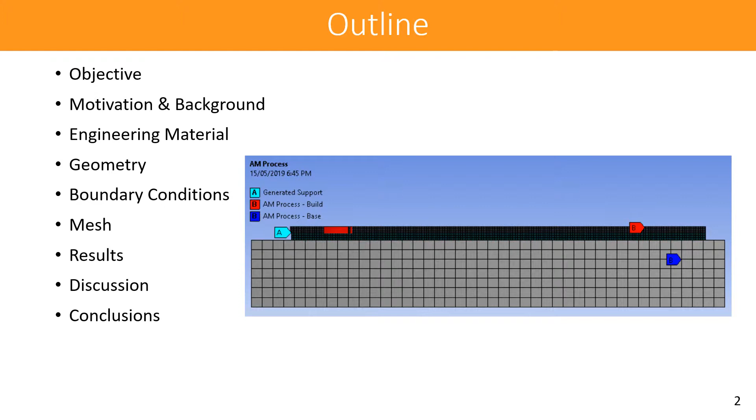This project focuses on studying an additively manufactured part subjected to two extreme solar radiation cycles in low Earth orbit space with the new additive manufacturing tool of ANSYS 2019 R1. Two coupled simulation studies have been carried out. First, transient thermal analysis to see the effect of two extreme radiation temperatures on the build parts, and then static structural analysis to find out the structural effect on the build part caused by the additive manufacturing process.

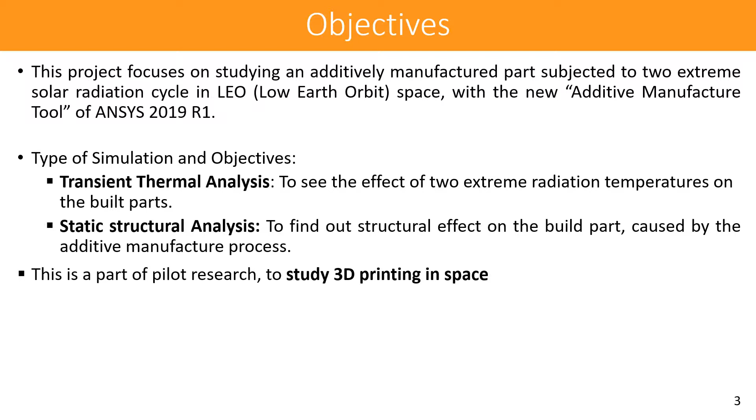This project is also part of a pilot research to study 3D printing in space that is currently under consideration at CSETR of UTEP. Additive manufacturing technology is rapidly developing since its introduction in the 1980s and spreading to almost every sector today due to its inherent capabilities. It has truly transformed and revolutionized today's design and manufacturing sectors, offering enhanced performance and custom capabilities in almost every sector known.

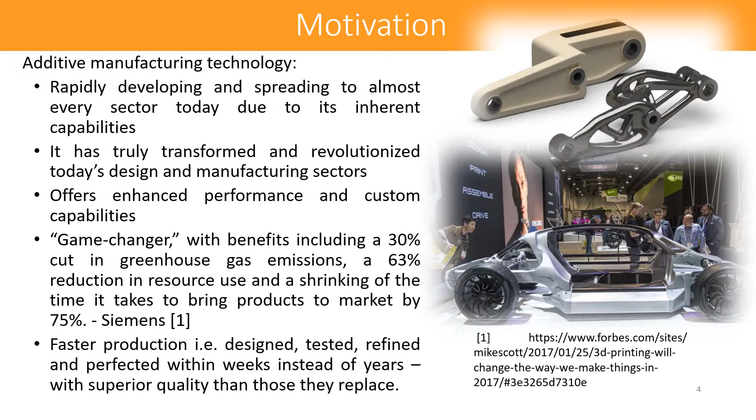According to Siemens, the technology is a game changer, with benefits including a 30% cut in greenhouse gas emissions, a 63% reduction in resource use, and a shrinkage of the time it takes to bring products to market by 75%. Thanks to improved design flexibility, components that could take 2 years to progress from drawing board to factory can now be designed, tested, refined, and perfected within weeks instead, and they are of higher quality than those they replace.

As mentioned earlier, additive manufacturing is spreading rapidly, and now it's time to apply it to space. Consider this, it takes $2 million for a single brick to be shipped to the moon. Considering such prohibitive transportation cost, a 3D printer would definitely prove to be cost-effective and produce items as and when needed, which would no doubt improve operational capabilities in space. However, in order to reach that stage, we need to overcome the challenges of space. Of the challenges, this project will deal with the extreme temperatures caused by solar radiation.

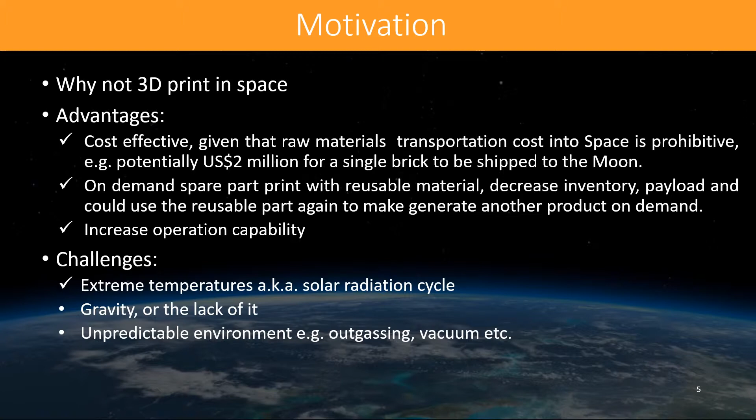Already, NASA and some other organizations are taking steps to counter the challenge. In 2014, NASA scientists aboard the International Space Station 3D printed a ratchet wrench for the first time in human history, using a CAD file transmitted from NASA's Marshall Space Flight Center in Huntsville, Alabama.

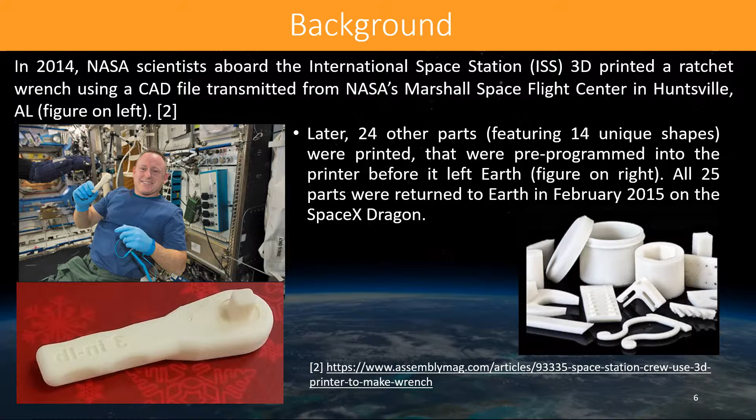Later, 24 other parts, featuring 14 unique shapes, were printed that were pre-programmed into the printer before it left Earth. You can see the 24 parts on the right side of the screen, and all 25 parts were returned to Earth in February 2015 on the SpaceX Dragon.

316 stainless steel is chosen. It is a popular space-grade material that has the ability to withstand high temperatures, atomic oxygen, and other features as well that are critical in space engineering. The material library provided by ANSYS contains 6 materials typically used in metal additive manufacturing, including our selection, 316 stainless steel.

For additive manufacturing thermal and structural analysis, the material property requirement is a little different. Thermal conductivity, density, specific heat, elasticity, plasticity, etc. All of the properties need to go all the way up to the melting temperature of the alloy, because each layer is introduced at the melting temperature. The assumption here is that in the layer there is no overmelting or undermelting of the powder. The entire layer is brought right to the melting temperature.

And as it cools down, as the layer decreases in temperature, it needs to have the full conductivity, Young's modulus, and all of the properties assigned from room temperature to melting temperature, so it can simulate that area of high temperature. In the engineering library, these data are provided.

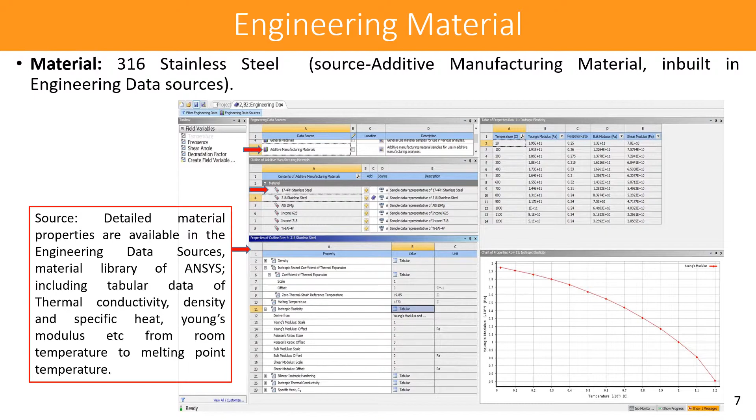A simple combination wrench is chosen for the project. This versatile tool may come in handy, keeping in mind the background story. Defeaturing of parts or segments, such as fillets on the grip side, is done to facilitate contact between base plate and build for computational simplicity. A base or build plate geometry is also designed at a shallow distance, that is 5 mm along the z-axis below the wrench, and a gap is kept to generate support.

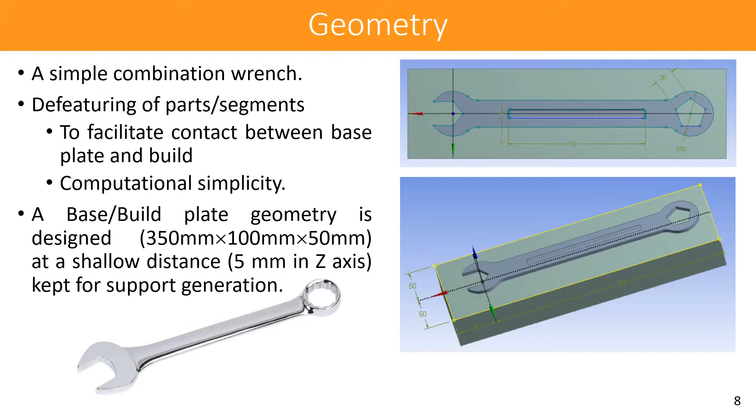Of all the vastness of space, this project focuses on the thermal cycle challenge at low Earth orbit. According to J.H. Han and his group, the maximum and minimum operating temperatures at LEO for the thermal cycling simulation are 100 degrees Celsius and minus 70 degrees Celsius, and no gravity force will be applied for this analysis.

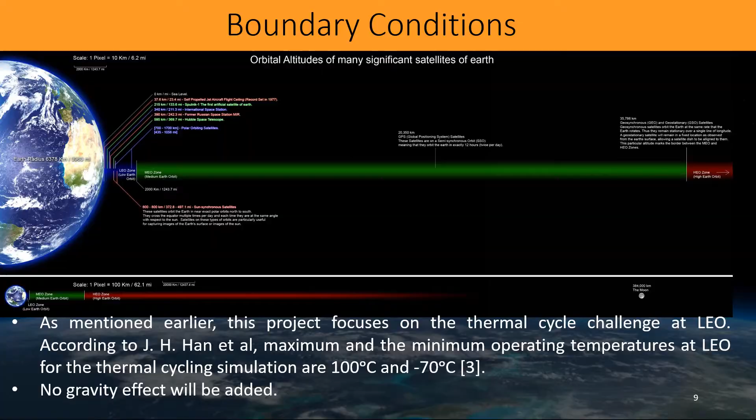One thermal cycle from 100 degrees to minus 70 degrees and again back to 100 degrees Celsius takes about 64 minutes. So it is safe to assume two extreme radiations as the study suggests. Therefore, we will be considering transient thermal condition 1 at 100 degrees Celsius and condition 2 at negative 70 degrees Celsius. Some of the other assumptions are that the enclosure or room temperature will be 15 degrees Celsius.

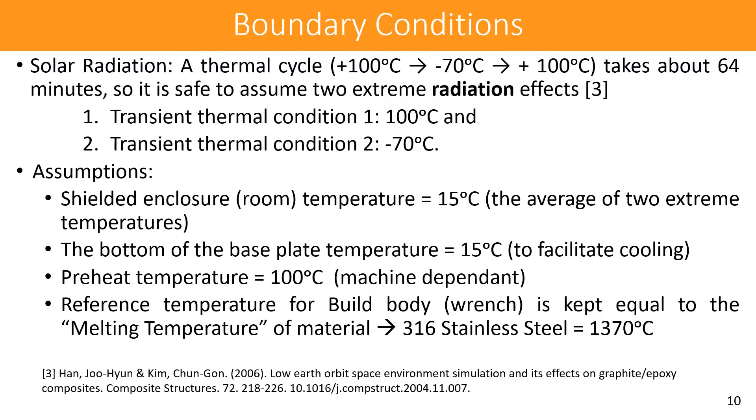The bottom of the base plate temperature is set to room temperature. Preheat temperature is taken to be 100 degrees Celsius, and reference temperature for build body wrench is kept equal to the melting temperature of 316 stainless steel. Here the boundary conditions can be seen in the two images. On the left, the transient thermal condition 1, and on the right, the transient thermal condition 2.

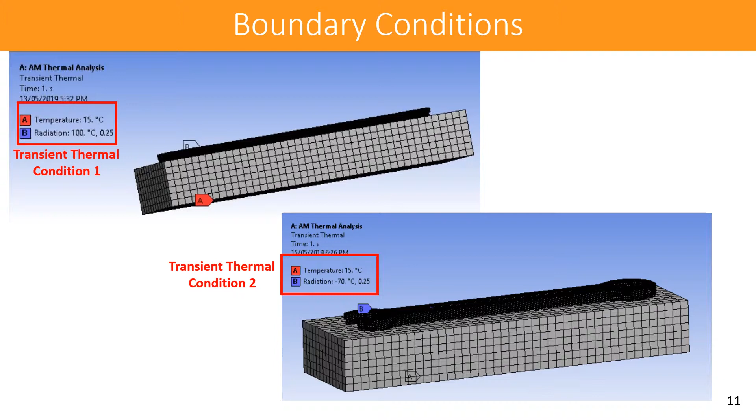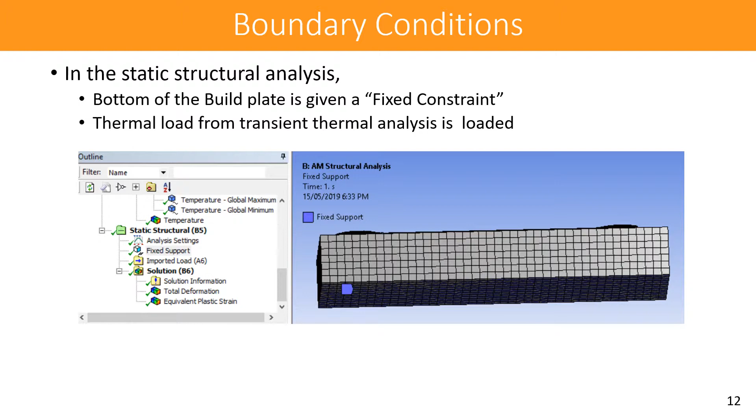The static structural analysis will have a fixed constraint at the bottom of the build plate, and all the thermal load from transient thermal analysis is loaded prior to its analysis. Overall, simple boundary conditions have been used because the additive manufacturing build-up analysis itself needs a lot of computational resources.

Now for additive manufacturing simulation, as mentioned earlier, in the part details for the build part, the reference temperature is specified to its melting temperature, 1370 degrees Celsius, as you can see on the bottom right figure, to ensure zero strain point when the layers are brought in, and so as it cools off, it will develop negative strain as it shrinks. For base part, reference temperature is kept by environment, which is equal to the room temperature.

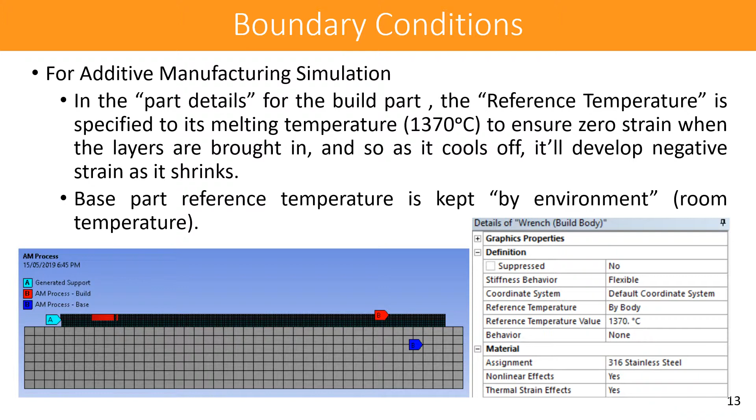For additive buildup, the deposition thickness, hatch spacing, scan speed are chosen as shown on the screen. A purge gas with really low convection coefficient is assumed to be flowing over the build as the process runs. As the powder is not directly modeled, a powder property factor is assigned along with an even lower convection coefficient.

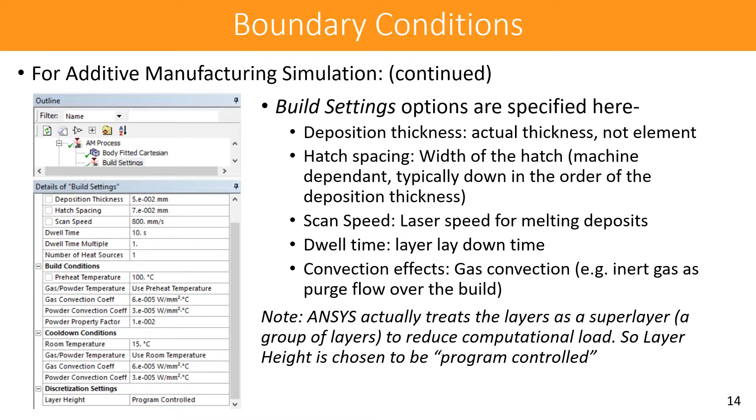Body-fitted Cartesian mesh has been used for meshing. It consists mostly of hexahedral elements with faces that are aligned with the coordinate axis. It is used to subdivide support and build region into discrete layers that are all uniform in thickness. These are the superlayers brought in by element birth option, layer by layer.

At the interface, it is important to make sure that the supports and the build part, if modeled together using shared topology, that all of the nodes are completely coincident at the interface. And then this will bring in the special build layer by layer all the way through to the top. Projection factor needs to be set to 0. This is a must to force it to have strictly uniform layers. If changed, it will be forced to follow the geometry much more closely, so we will not get even layers and the simulation will not run.

Cartesian mesh uses a top-down meshing approach. In this method, the mesher continuously refines the initial grid in a binary fashion in each dimension, eliminating the non-volume cells up to the specified maximum refinement. The Cartesian mesher does not require an existing surface mesh and will ignore meshing parameters defined to control local surfaces. The mesh will be refined until the finest cell size does not exceed the maximum element size specified in the global mesh setup or the surface mesh setup.

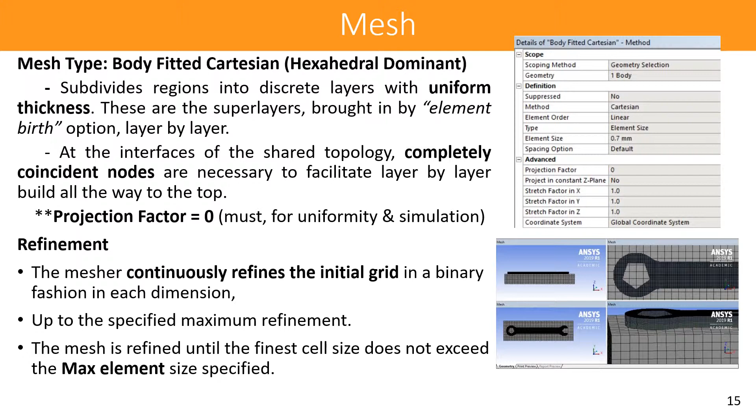Individual part maximum element sizes are set after a coarse mesh study with the smallest size allocated to the build part. Normally, the mesh size should be 5 to 15 times the deposit thickness. In this case, the deposit thickness is chosen 50 micrometers, so the selected mesh size is 0.7 millimeter, and for the base body, mesh size is 8 millimeters. The refinement significantly increases the elements and nodes.

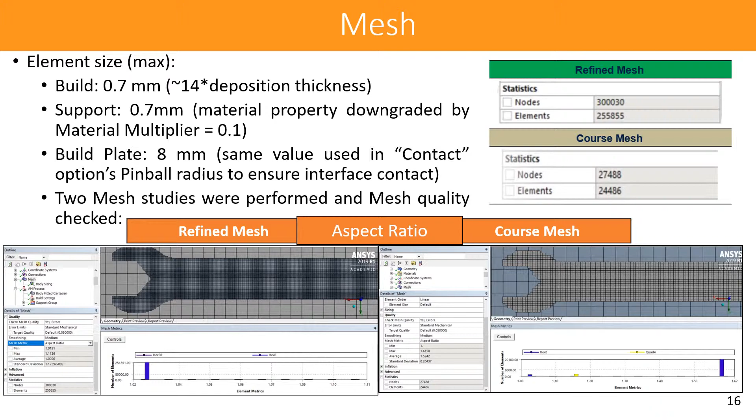After careful study of the mesh qualities by checking the orthogonal quality, mesh element quality, also skewness, and aspect ratio for hexahedral elements, the refined mesh is chosen as final mesh for analysis, although it significantly increases the number of nodes and elements.

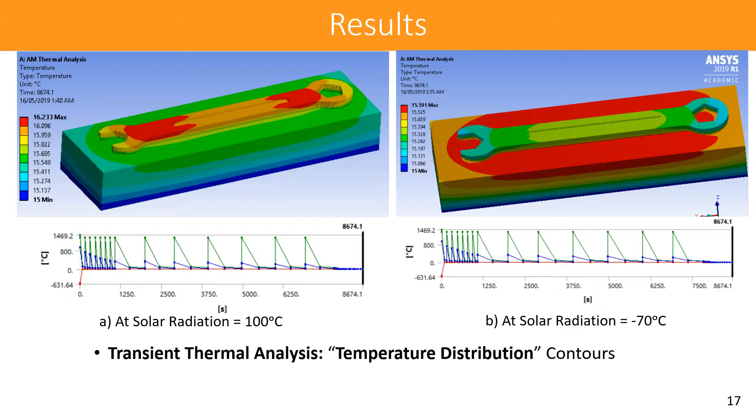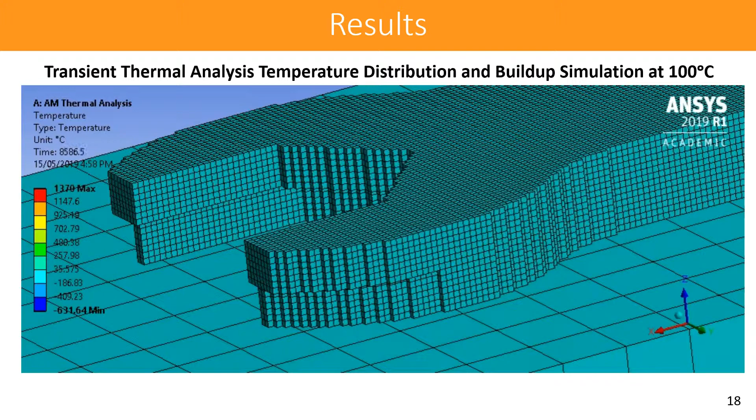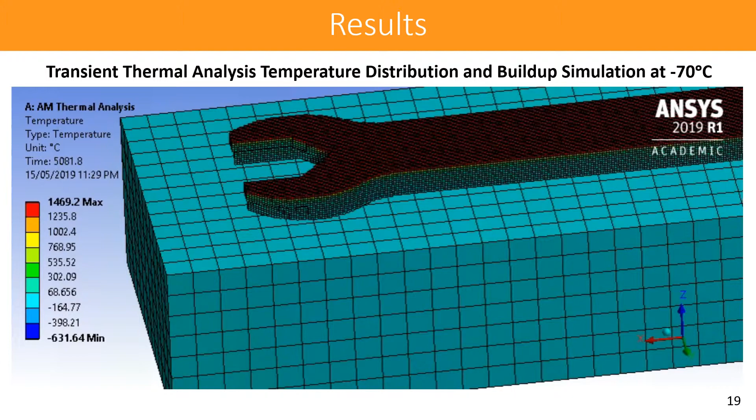From the temperature distribution contours for transient thermal analysis, the part on the left exposed to higher solar radiation has slightly higher maximum temperature, whereas the figure on the right side shows that the temperature has seeped into the built part and the wrench no longer has the highest temperature as the environment facilitates faster cooling. This close-up video of the transient thermal analysis shows more clearly how the birth element brings in layers at melting temperatures and each layer's cool-down process. This is showing the transient thermal analysis of study 2 at -70 degrees Celsius.

The heat convergence charts for transient thermal analysis are almost similar, given the similar temperature distribution, but the lower radiation converges ahead of that for the higher radiation temperature. The graph is divided into two parts. On the left side, the build, and on the right, with faster convergence rate, the cool down iterations, approximately 162nd iteration onward.

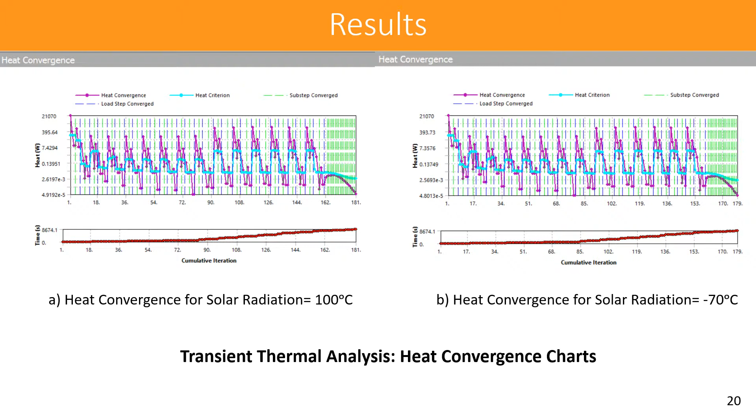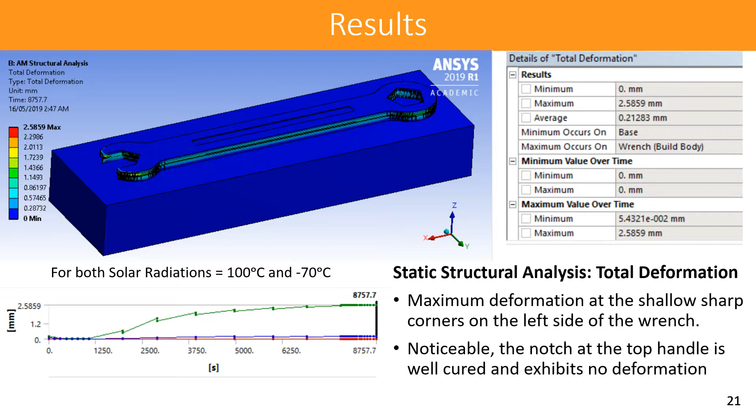For both studies, static structural yielded the same result. In the total deformation of the wrench, maximum deformation can be seen in the shallow, sharp corners on the left side of the wrench. Also, both sides of the wrench have higher deformation. Noticeably, the notch at the top handle is well cured and exhibits no deformation. This is an exaggerated view of the same. Maximum deformation of 2.59 millimeters is observed at the top tip of the two edges of the wrench.

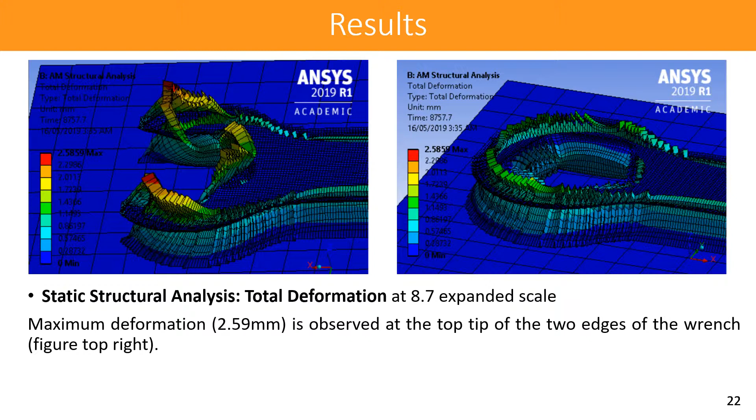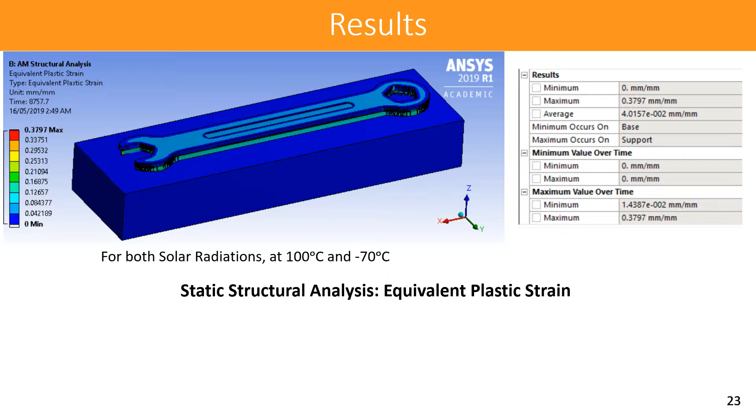Static structural shows plastic strain. Therefore, although slight, there is plastic deformation. From an exaggerated view, the maximum plastic strain can be observed at the bottom of the tip of the two edges of the wrench.

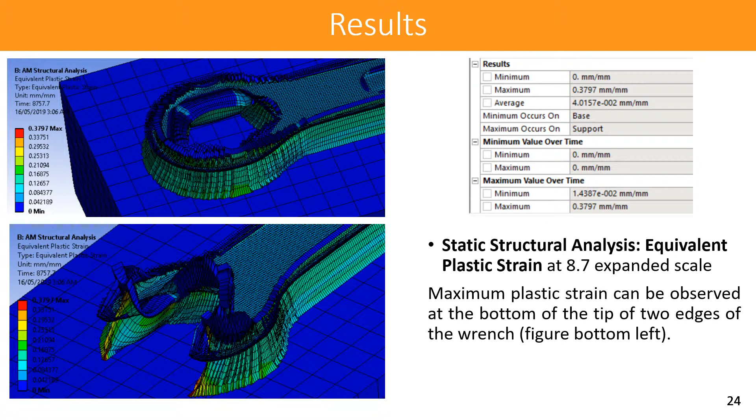This video of the static structural analysis shows the equivalent plastic strain more clearly. For the built body, maximum plastic strain is 0.084 mm per millimeter, which is found at the top and in areas of changing geometries.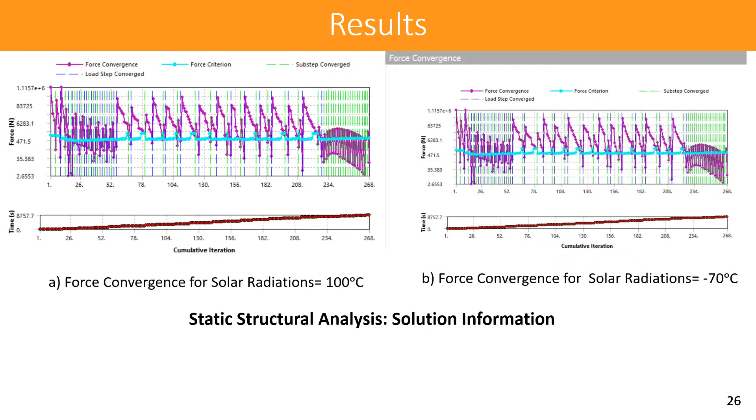This simulation study helps in understanding material distortion in additive manufacturing before printing it. That is a huge all-around benefit. From the temperature distribution contours of the transient thermal analysis, slightly higher temperature is found at the top layer of the built body and slightly smaller values of 15.5 degrees Celsius is observed by the build plate.

That is the maximum for the second study, specifically at the top layers of the built body near the wrench as the heat seeps through it. The slightly lower temperature is due to the low radiation exposure. Therefore, heat transfer here can be said to be convection dominant, although the convection coefficients were kept quite low.

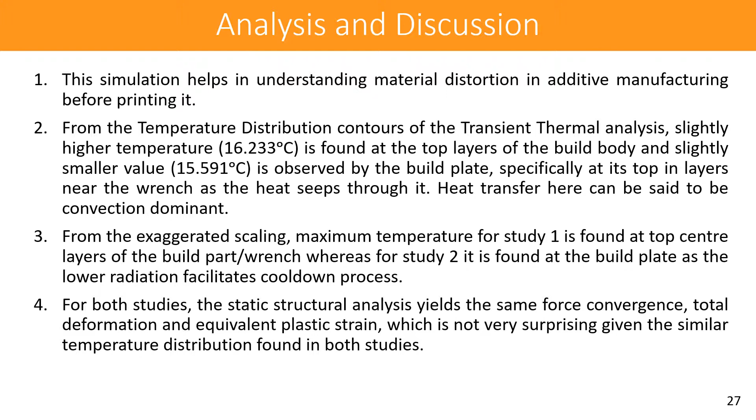From the exaggerated views, maximum temperature for study 1 is found at the top center layers of the build part, whereas for study 2 it is found at the build plate as the lower radiation facilitates faster cooling. For both studies, the static structural analysis yields the same force convergence, total deformation, and plastic strain, which is not very surprising given the similar temperature distribution found in both studies.

Peak deformation of 2.59 mm is found at the two corners or tips of the wrench grip, mostly at the build support interface, most probably due to a low material multiplier factor of the support. It was kept low in order to reduce hardware computational load as the additive manufacturing tool with almost 300,000 nodes is naturally computationally heavy.

The average deformation is quite small, 0.21283, and on average, the higher deformation is observed at the build support interface. Almost no deformation is seen at the top, and the center notch of the top handle is well cured and also exhibits zero deformation. There is plastic deformation.

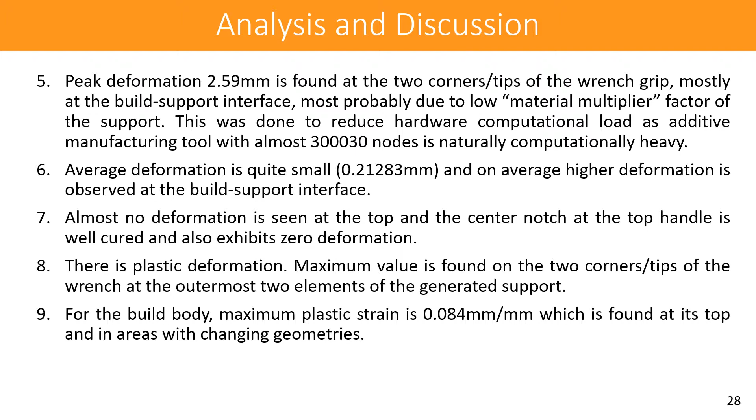Maximum value is found on the two corner tips of the wrench at the outermost two elements of the generated support. For the built body, maximum plastic strain is 0.084 mm over millimeter, which is found at its top and in areas with changing geometries. The zero strain set at melting temperature helps in reducing the distortion, but it can be further perfected before actually printing out the product.

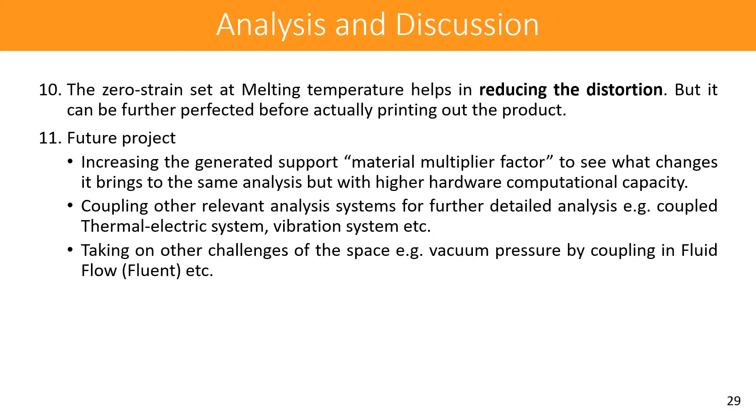As a future project, a similar study can be done by increasing the generated support material multiplier factor to see what changes it brings to the same analysis, but with higher hardware computational capacity. Another study can be done by coupling other relevant analysis systems for further detailed analysis. For example, a coupled thermal electric system or a vibration system, etc. Also, taking on other challenges that space offers, for example, the vacuum pressure by coupling in fluid flow, can also be done.

This project was focused on studying an additively manufactured part subjected to two extreme solar radiation cycles in low Earth orbit space with the new additive manufacturing tool of ANSYS 2019 R1. Two types of coupled simulations were successfully conducted and results were obtained. The temperature distribution in the transient thermal analysis helped to visualize and learn the effect of two extreme radiation temperatures on the build parts. And the total deformation and equivalent plastic strain results obtained from the coupled static structural analysis clearly showed where the manufactured parts developed strain and distorted the most.

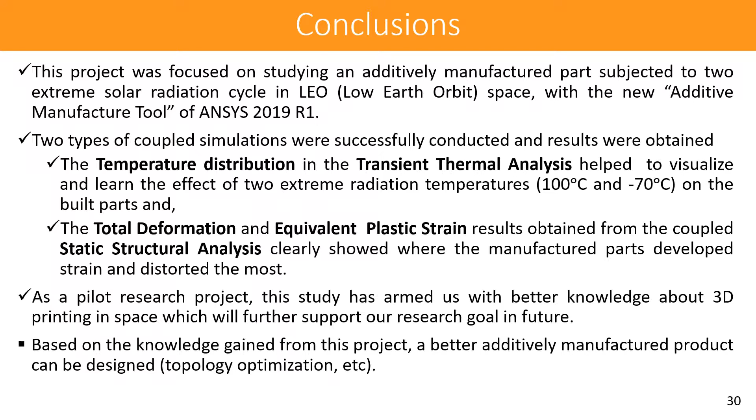As a pilot research project, this study has armed us with better knowledge about 3D printing in space, which will further support our research goal in future. In conclusion, a better additively manufactured product can be designed with the help of different tools, for example, topology optimization, based on the knowledge gained from this project.

A directed energy deposition system has been modeled since this is the only available additive manufacturing process in ANSYS. However, it is not practical for space, which is a major limitation of this project. Other limitations include the hardware computation capability. For this project, a dual-core processor with 55 GB disk space was used, which was fully consumed while running this process. The compromise for meshing had to be done. Because of the capability limitation, each analysis took almost 14 hours, which is not very efficient. With richer computational resources, even higher accuracy results can be obtained.

The additive manufacturing tool of ANSYS is fairly new, and like any other new tool, it also has some glitches, of which the ANSYS community is informed. For example, this tool has an additive manufacturing sequence option in the mechanical modeler, where other than the build step, the cool down step, removal of base and removal of support can be chosen. But the last two steps resulted in a convergence failure every time. Resetting or cancellation options also stopped working, so the project had to be redone from scratch without selecting these two options.